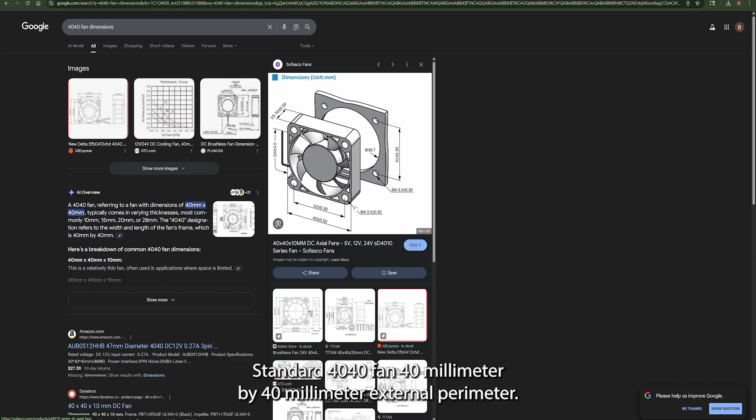Now the fan I'm creating a vent for is very simple, standard 4040 fan, 40 millimeter by 40 millimeter external perimeter. What's nice about something standard like that is there are existing drawings. You don't have to go measure all the dimensions that are critical to your design. You can look it up and just model based on that. So that's what we're going to do rather than having to model something or measure something custom.

So the first thing we need to do is go ahead and create our first sketch. I like to model things in their installation orientation. Some people don't, but that's what I'm going to do. So my box will be upright. So I'm going to model it on this front face. One of the first things I always do when modeling is I create center lines. Sometimes I use them, sometimes I don't, but just as a general practice, they make doing constraints much easier.

And so I'm picking a line up here. Oops. Picking a line and then picking center line to make that a dashed line. It's a little hard to see on the red, but you can see how it's a dashed line, meaning that's not an actual model construct, but just something that I can use to set constraints off of.

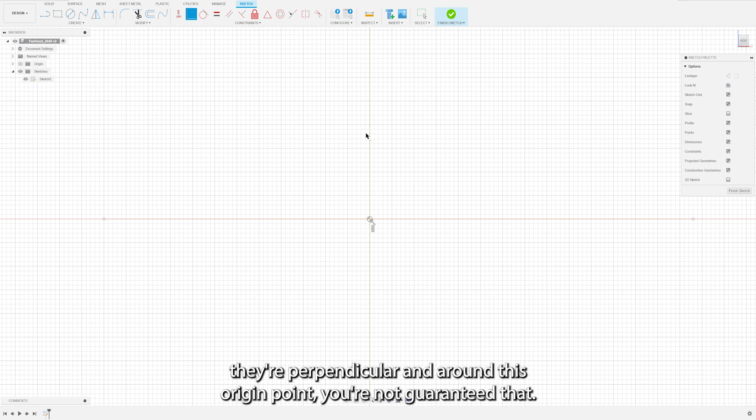Unfortunately, in Fusion, even though these look like they're perpendicular and around this origin point, you're not guaranteed that. So I'm going to go ahead and pick a coincident constraint, click my line, and then click this origin. Now it's guaranteed to be on that origin. I'm going to do the same thing here, and now they're both exactly on that origin.

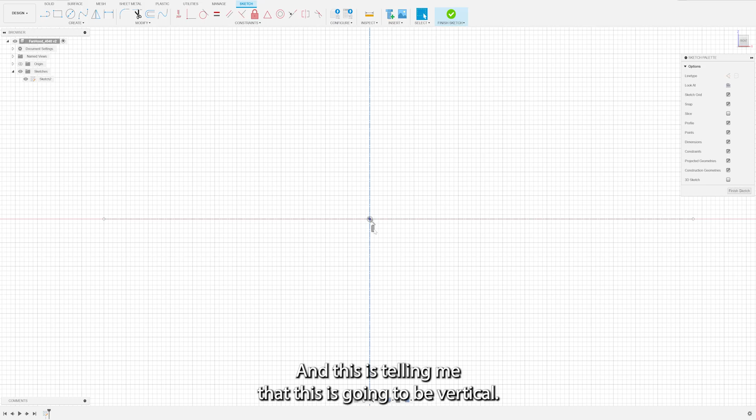I can see right here that it did apply a perpendicular constraint to these two lines, so they are at 90 degrees, and this is telling me that this is going to be vertical. Now, just to double check, I always like to go ahead and say horizontal/vertical, and I'm going to click this line. It says that's over constrained because of this perpendicularity constraint combined with this horizontal constraint. So that's okay. That just means that I am guaranteed that these are what I want. They are a perpendicular set of construction axes around the origin.

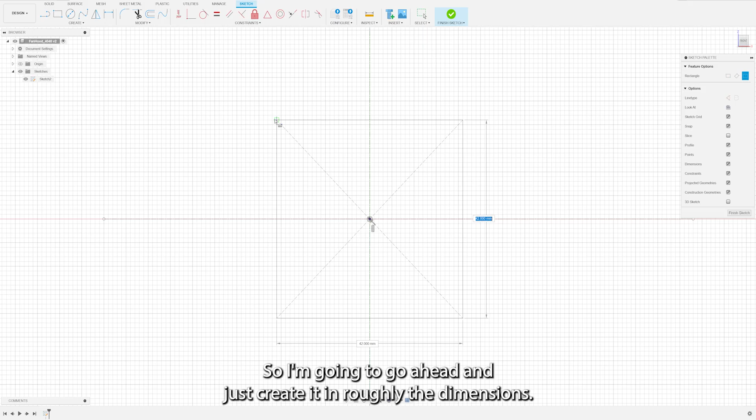So what that lets me do is I can now go ahead and start my feature set knowing that I have a good reference point if I ever want to do any symmetry constraints, which especially for a design like this fan, I will want to do. So I'm going to pick a 2-point rectangle, but I'm going to come over here to my sketch palette and do a center rectangle because this is going to be a symmetric square that I'm creating. So I'm going to go ahead and just create it in roughly the dimensions I need.

A mistake a lot of beginners make is they try to create their initial features at exactly the size that they want them to be versus roughly the size they want them to be. So just create a square or a rectangle of approximate dimensions you want, and then come in and size it using your actual entry box here.

Another thing I know from the drawing that I had pulled up earlier is that this is a square, not a rectangle. So I use this equal constraint, click this line, then this line, and that makes this an actual square. And you can tell that because all these lines turned black. So if I undo what I just did with Control Z, you'll notice this line's blue and this line's black. The fact I did a center rectangle automatically makes these symmetric around this center point.

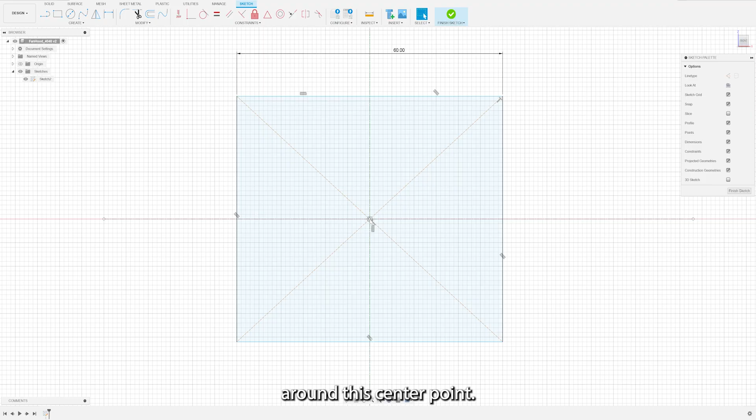But the fact this is blue is telling me it's what we call partially constrained, meaning I can still move this. Whereas this black line, I can't move it. I can click on it and drag and nothing happens because it's constrained by this. What you really want is fully constrained models.

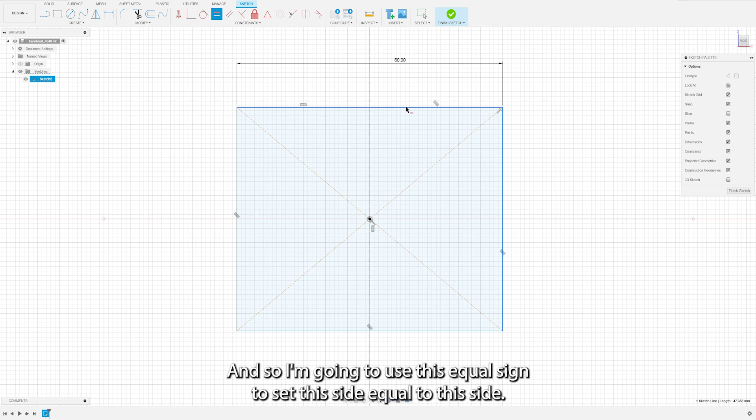And so I'm going to use this equal sign to set this side equal to this side. Now when I do that, it automatically resizes to a square, and you'll notice all my lines are black now, not blue. So that means this model is fully constrained. I cannot move any of these items. They're fully dimensioned. It's completely parameterized. This square is now where I want it to be.

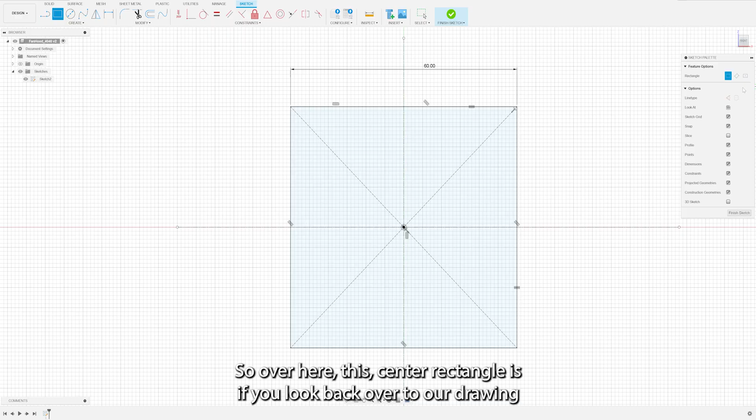Now the other nice thing about doing this as a center point rectangle, so over here this center rectangle, is if you look back over to our drawing that gives us our dimensions here, these circles for my bolts are all going to need to be symmetric. They're all equally spaced around the fan housing. So this center point rectangle gives me these diagonals.

And if I put my circles on those diagonals, it just makes it a lot easier to then make everything symmetric because I can make sure this green is on this diagonal. You can see I'll get a green line there whenever I am horizontal to this circle, which is what I want. So we're going to go ahead and create the rest of these circles, and then we'll dimension them as well.

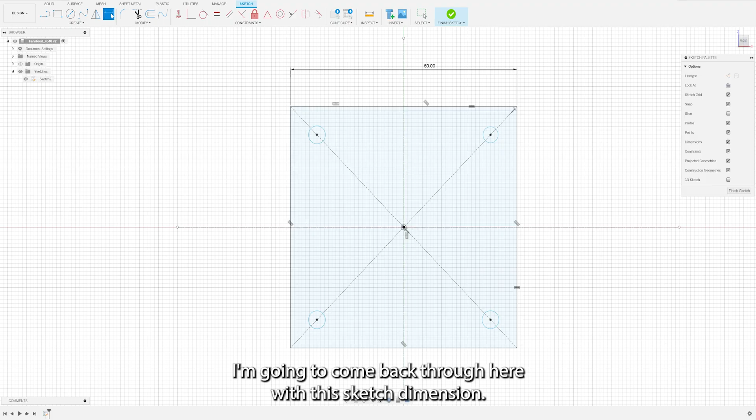So again, this is not the actual size of the circles. I just made 4 randomly sized circles of about the size I wanted. I'm going to come back through here with this sketch dimension, click on the circle, click out here, and I know those are 4 millimeters per the drawing. However, I'm going to 3D print this, and my 3D printer has some tolerance in it that I've just learned over time of using it, so I'm actually going to size these at 4.3 millimeters. That will allow my through-hole bolt to pass through cleanly without the threads catching on the hole.

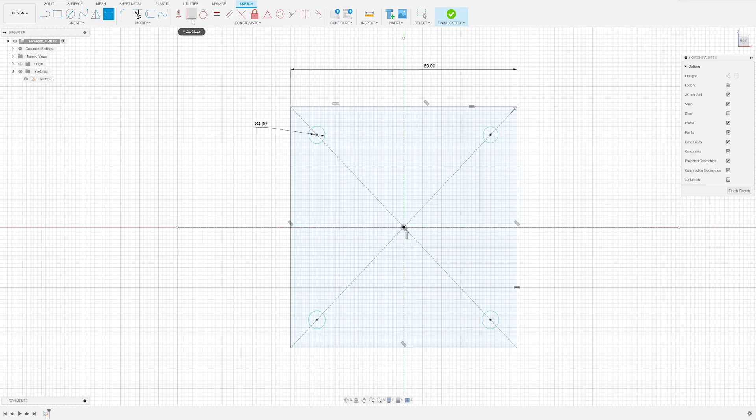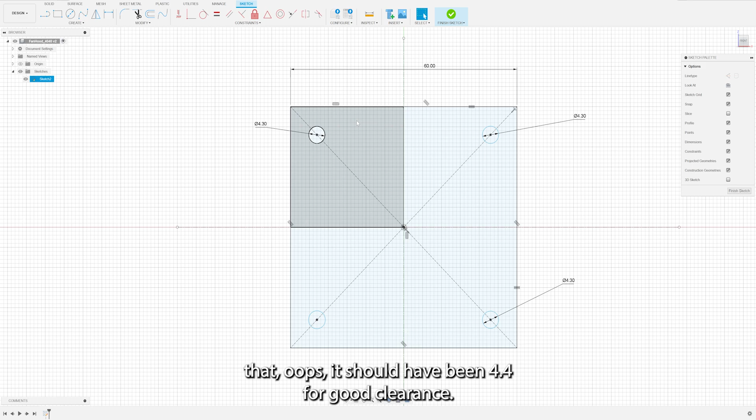Now you'll notice all these are still blue, and we talked earlier about wanting to have things fully dimensioned. So one thing, I'm going to use this equal constraint to apply this 4.3 to all 4 of the other circles. Now I could do that by just dimensioning all of these circles as well, 4.3, all the way through all these circles. But let's say I go through and I 3D print this and realize that, oops, it should have been 4.4 for good clearance. Well, now I have to go change 4 dimensions.

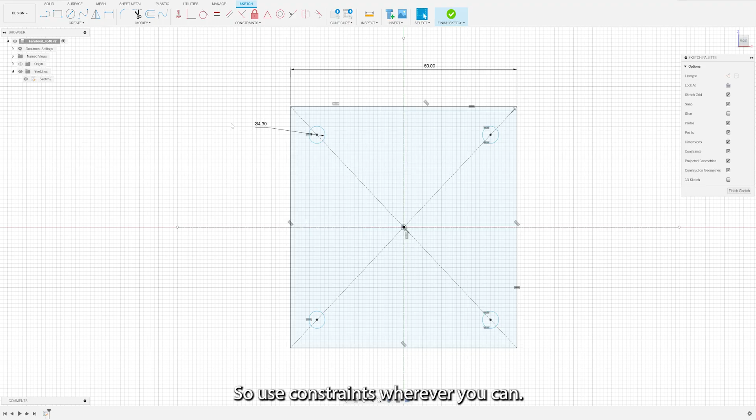Instead, if I use this equal here and just say, hey, this circle's size is equal to this circle's size, and this circle's size is equal to this one, and this one is equal to this one. Now I can just change 1 dimension, and all my circles change. So use constraints wherever you can, and it greatly simplifies your ability to scale and modify your drawing.

Another thing, even though those green lines showed up that showed that I placed these as horizontal and vertical items, we really want to make sure that happens. So I'm going to go through and manually apply that constraint as well to all of these. And that, in a lot of cases, is going to say it's over constrained because it already did it, but that's okay. I really want to make sure that happened. So actually it's showing me it did not automatically apply those. And oh, that one did. So sketch geometry is over constrained. Again, that's okay. It just means that that constraint was already there.

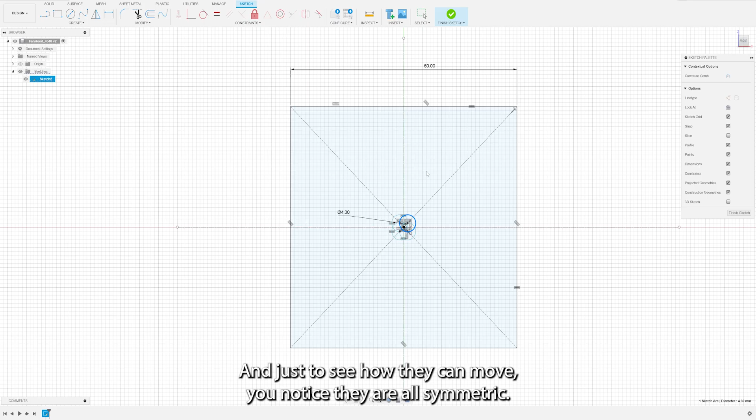So we have one more thing we really want to make sure we do, because you notice these are still blue. So if we're curious about what is unconstrained, we can grab these and just see how they can move. And you notice they are all symmetric, right? They all move together. But there's obviously a missing dimension. It's the hole spacing. So how far apart are the holes? So I'm going to go look on another screen here over to my hole dimensions, and those are 32 millimeters. So we're going to type in 32 here. Now you'll notice all my lines everywhere are black. This drawing, these holes, everything is fully constrained.

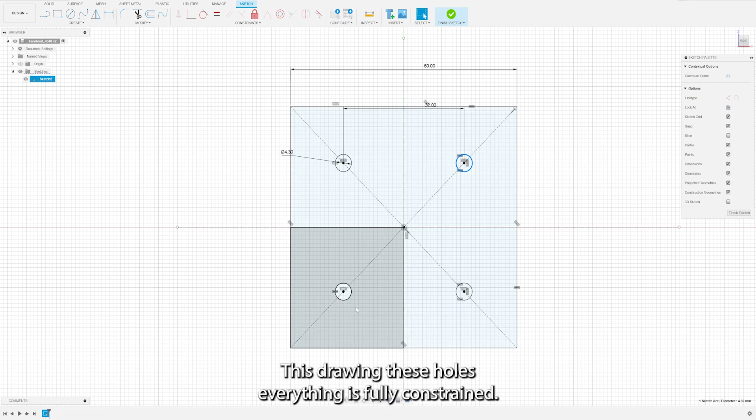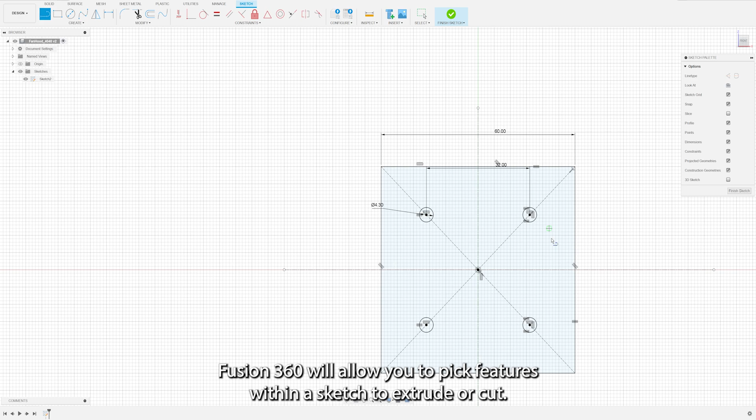I like to put as much as I can into the sketch, and then when I do cuts and extrusions, I can just keep referring to the same sketch. That's a little unique, at least for me, because most of the other modeling packages I've used professionally, you have to extrude the entirety of a sketch. Fusion 360 will allow you to pick features within a sketch to extrude or cut, so it makes it kind of nice because you can go ahead and do everything against common sets of constraints.

So this fan shroud that I'm going to make, I actually am going to press nuts into it, so that the bolts that I'm going to push in from the other side can thread into the nuts on this. Now that is obviously a horrible hex nut hole, but that's okay because again, constraints, right? I'm not going to try and make this exact. I'll make it approximate. Oops, I didn't want that coincident. Maybe I do. Maybe I don't. I don't know. We'll see what the dimensions are. So this obviously is not the right shape.

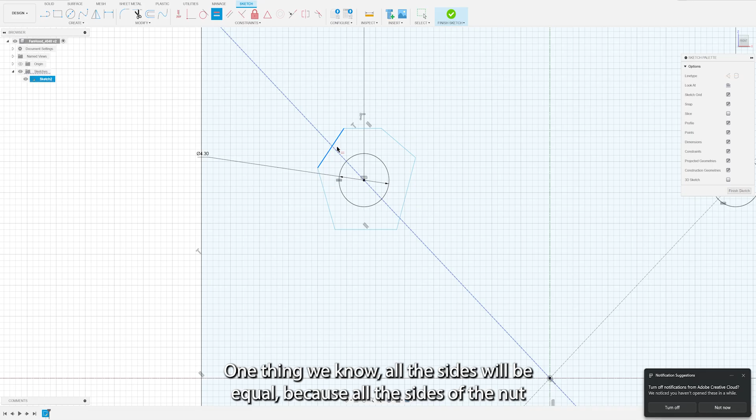Let's go ahead and start using constraints again. One thing we know, all the sides will be equal because all the sides of the nut that will be placed there are going to be equal. So we'll just go ahead and start applying some constraints. That looks a little better. Kind of drag it into the right general shape.

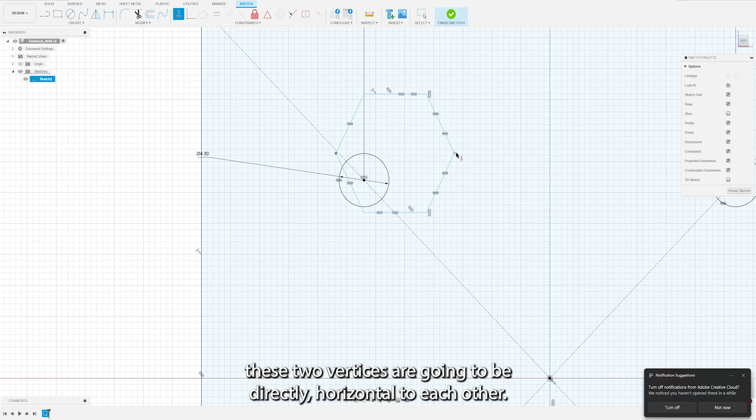And now I can start applying things like horizontals and verticals. So we know that these are going to be directly above each other. And we know that these 2 vertices are going to be directly horizontal to each other. So hit escape. Escape's always a good key to kind of get out of whatever we were stuck in.

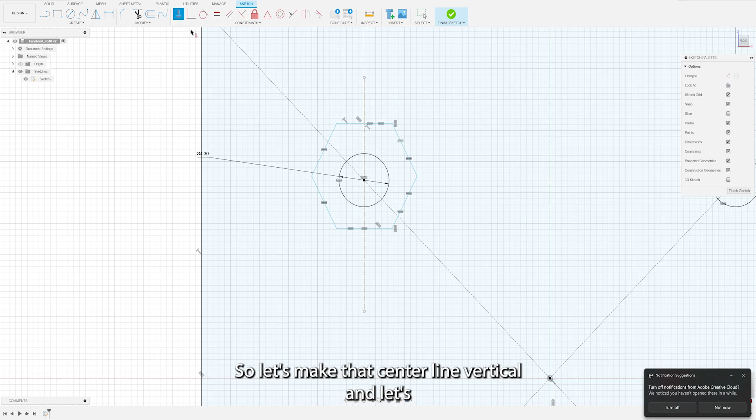And now I want to drag this guy around this hole. So I need to be symmetric about this hole. So I'm going to add another center line around this hole just to make things easy on myself. So let's make that center line vertical, and let's make it coincident with the center of my circle.

And now I can use this symmetry constraint right here to hit these 2 vertices and put it around this hole right here. And then I can use my horizontal constraint with the center of the circle and one of these vertices, and now I have the sketch of the outline of the cavity where it needs to be.

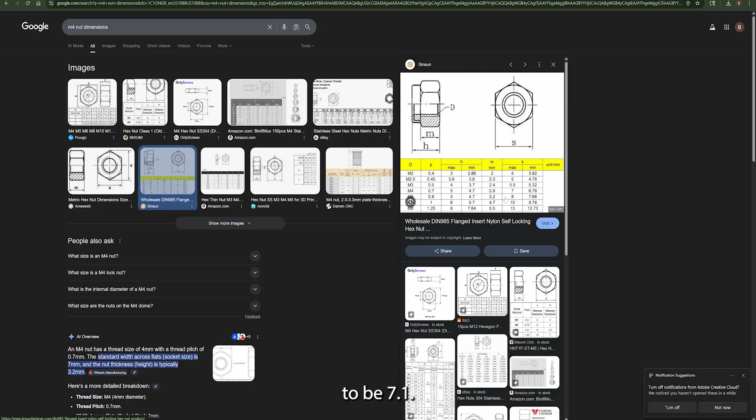So I can go through here and dimension it in accordance with that drawing that we were just looking at that says that this needs to be 7.1. Second set of dimensions between these flats. And if I make that match the first, now we'll notice all my lines are black. So this is a fully constrained sketch.

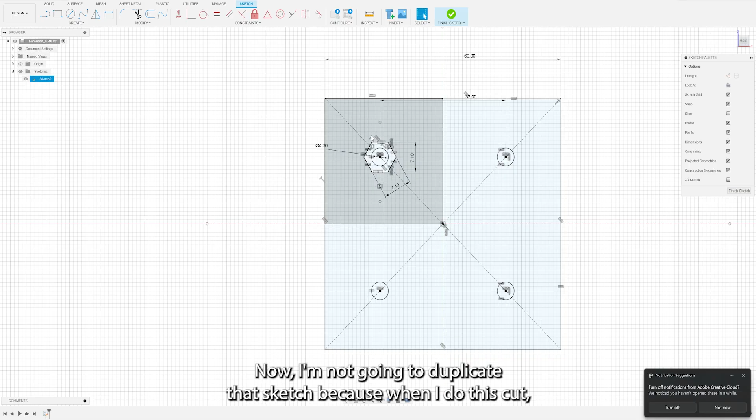Now I'm not going to duplicate that sketch because when I do this cut, I'm going to replicate that using a pattern feature that we'll show later. There's no reason for me to go create this over and over and over again. I probably could have done the same with the holes, but I'm going to approach those a little differently, and I'll show you that later.

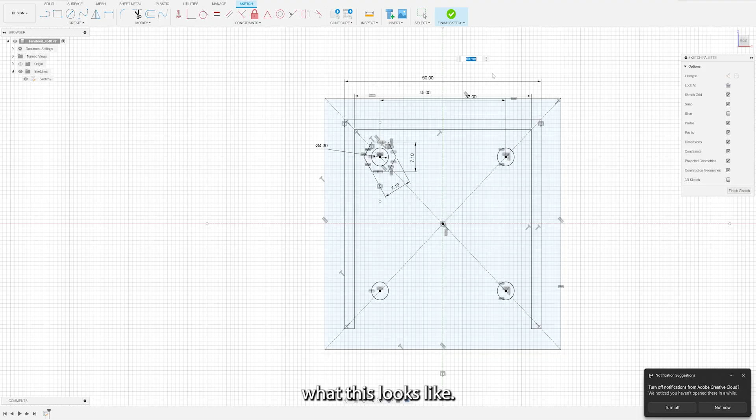I think this is all the features I want to put on my base drawing. I don't think I need a perimeter this big now that I kind of see what this looks like, so I'm going to bring this down to about 50. No reason to waste the extra material. So now I have this feature set, and I want to go ahead and create my extrusion. So I'm going to hit the extrude button.

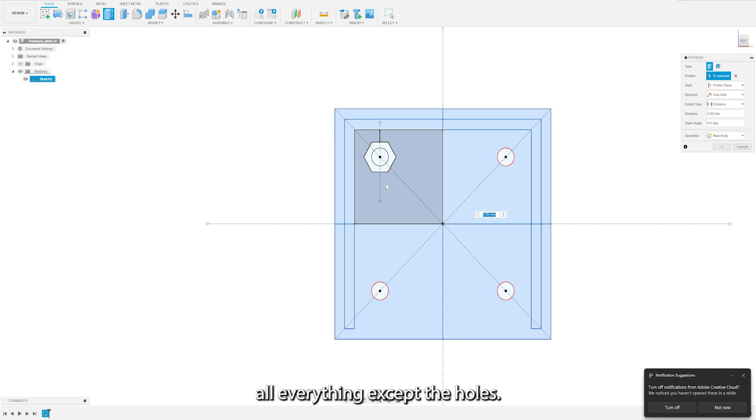And the pieces I want to extrude to start are going to be everything except the holes. And I'll show you why that is in a second, because we're going to re-extrude some of this as a cut, but a partial cut. So I'm going to select all of these items, and I'm going to rotate this with my middle mouse wheel button by clicking and moving that around. And now I can see this arrow and get some perspective about what I'm doing with this extrusion.

So 5 millimeters, that's probably good for what I want. That's just under a quarter inch, and that's probably good. So we're going to go -5. We're going to lock that in, and it's going to extrude a very boring looking rectangle.

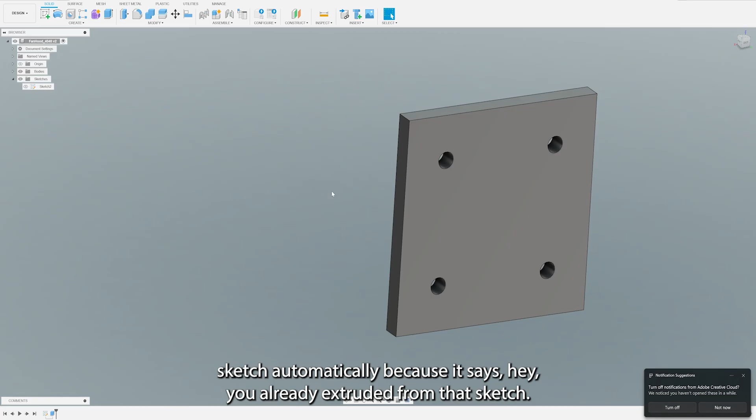Sometimes after you've done an extrusion, Fusion 360 might hide this sketch automatically because it says, hey, you already extruded from that sketch, you must be done with it. In our case, we are not done with that sketch. So if that happens to you, you just need to go over here to your model browser, hit this drop down, and then unhide. Click that little eye to show your sketch. And now you'll see I can see my sketch again.

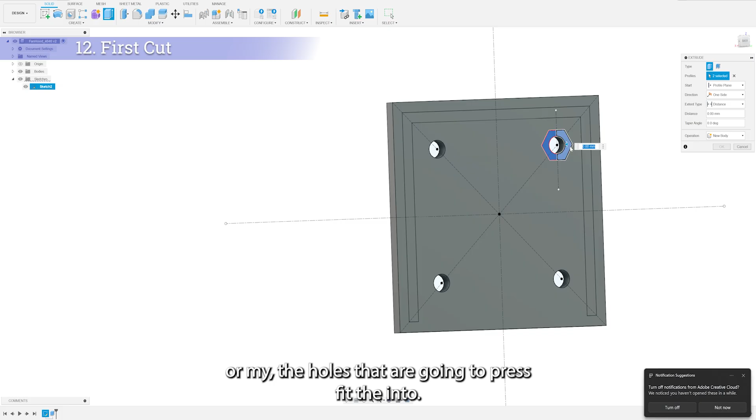The next thing I want to do is go ahead and extrude my bolt holes, or the holes that are going to press fit the nut into. And I want those to be cuts, not extrusions. So I don't want that. I actually want it to go the other way, but I don't want it to go all the way through. So I'm going to click and drag that, and Fusion's smart enough to realize that since I went into the material, it changes this operation to cut. I'm going to go about -2.5.

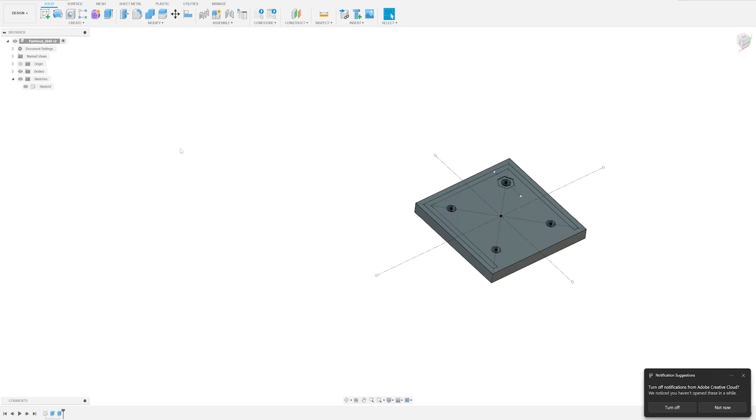Oops. I obviously did not extrude that enough. So in this situation where I made a mistake and did not extrude it far enough, it did extrude the cut, but that's not deep enough to press fit the nut into. You can come down here. This is your model history, and you can just double click on any feature that you want to change.

So I'm going to double click on this extrusion because I obviously did it wrong. Instead of 2.5, I put 0.25. So 2.5, and that needs to be a negative because it's a cut, or because it's going into the material. Now I have a nice deep recess to put the piece in.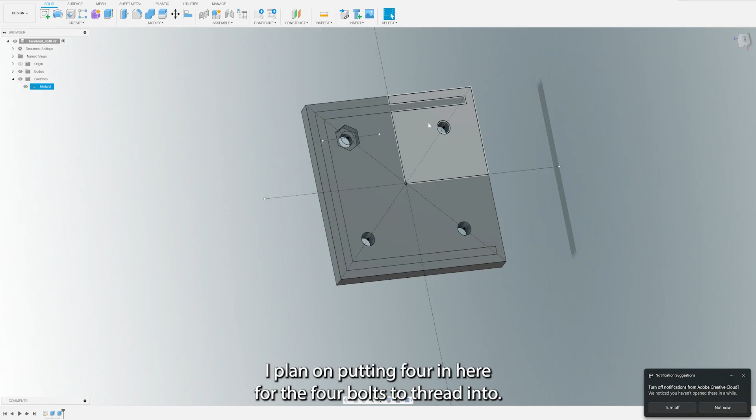Now that's just one of them. I plan on putting 4 in here for the 4 bolts to thread into. So the easiest way to do that is with this rectangular pattern tool. Now we can do that off feature sets, but we are going to go ahead and do features. We're going to select features, and now it's saying, hey, what feature do you want to repeat? And what we want is my last extrusion, which was that cut. So I'm going to come down here to the model tree and click that extrusion.

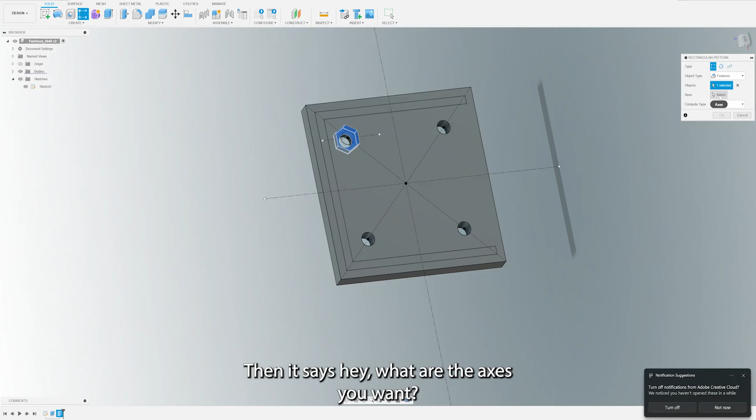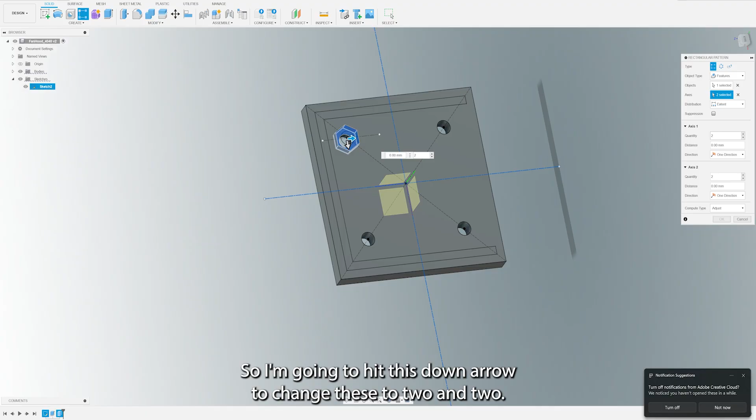Then it says, hey, what are the axes you want? Well, I want to pick 2 axes. I'm going to extrude in this direction and in this direction. So now I've picked 2 axes, and it adds those to my rectangular pattern tool over here. So for quantity, we're just doing 2 of each. So I'm going to hit this down arrow to change these to 2 and 2. Now right now they're right on top of each other, so just to get a visual approximation, we can go ahead and drag these guys across.

Now from our prior drawings, we know exactly what that dimension should be, and that dimension happens to be exactly 32 millimeters. Fusion's also pretty smart, and it says, oh, you probably want to use this circle, so it automatically finished putting it right there when I was doing that drag. If it didn't get that right, you can go into this distance box and type the actual distance that you want it to be. In our case, it's 32 millimeters from our drawing earlier. So I'm just going to do that and hit OK.

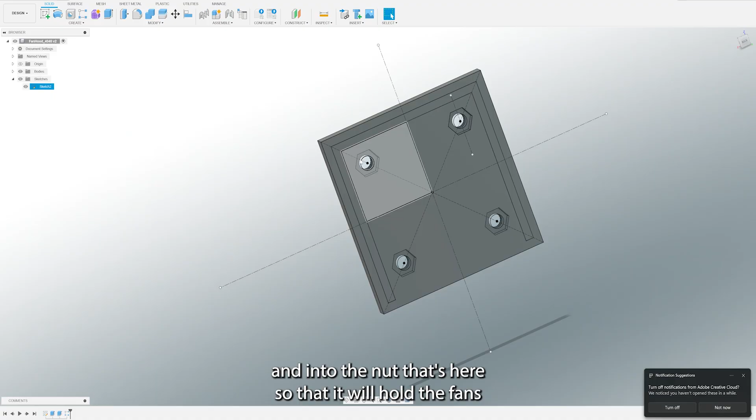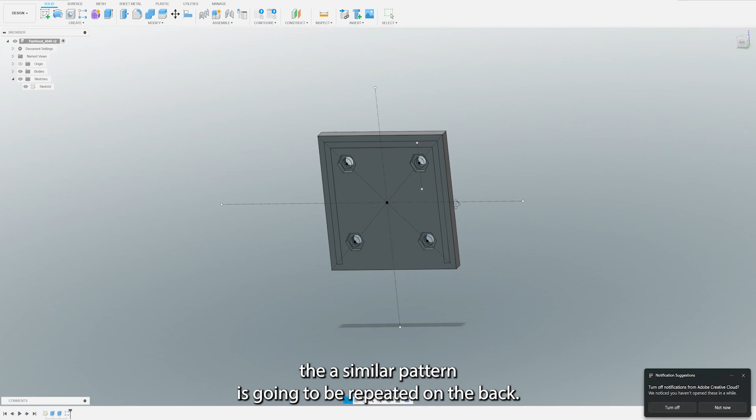Now you'll notice I have 4 recesses to put my pieces in so that I can thread through my lighting controller box through this hole and into the nut that's here so that it will hold the fan shroud in place. Now earlier I called this the room for the gasket. This is actually what I'm going to sweep for the fan hood. I'm going to sweep it a bit over like this to protect from any water or other ingress of things I don't want. A similar pattern is going to be repeated on the back that will be a cut. But this is going to be a sweep to form the actual fan shroud part that protects it from the elements.

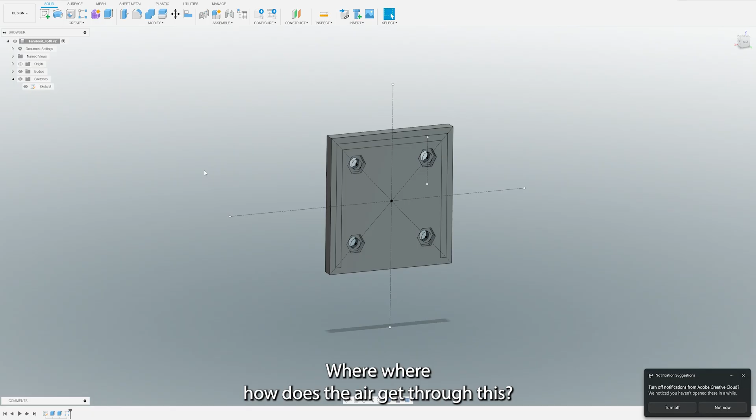Now there's one more piece that I noticed I forgot, and that is the circle for the fan. How does the air get through this? So I'm going to revisit my original sketch, again from this model history down in the bottom left of the screen. I'm going to double click on that sketch so I can get in to edit it again. And we have one more feature to add here, center diameter circle. We're going to click that. Also, shortcut key is C. So I can hit C, and now I can create this circle.

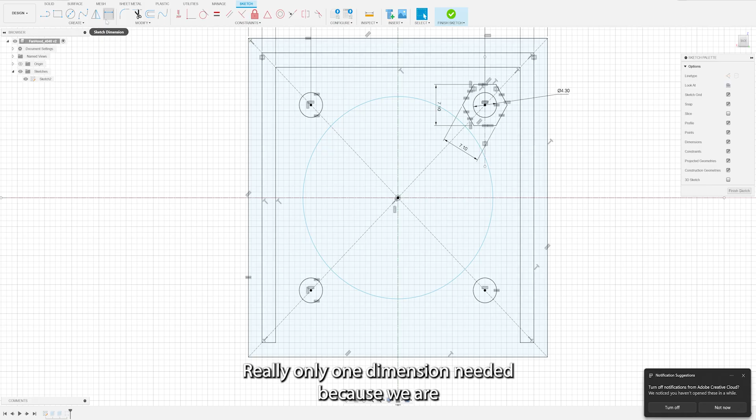Really only one dimension needed because we clicked on the center of this whole sketch. Symmetry really saves us a lot of trouble here. And now all we have to do is add a dimension. Per the drawing we had up earlier, that dimension should be, let's go over here and see. Looks like that dimension is 38.7 millimeters. So let's go ahead and make that 38.7. There we go. Now I can finish with this sketch again, and I can go ahead and extrude that.

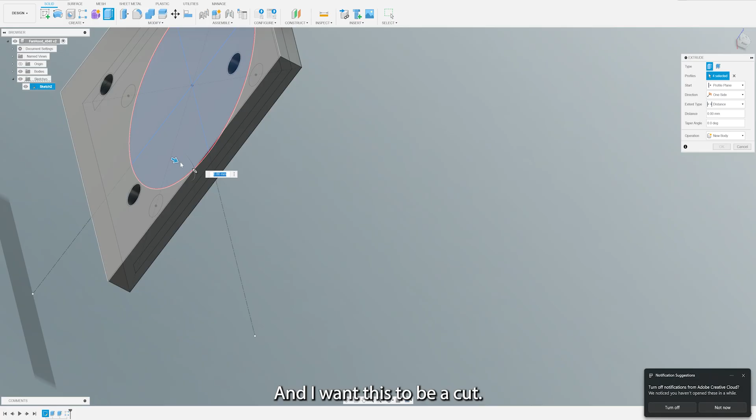Oops, selected too many things. Unselect them all with that X. Select that piece, that piece, that piece, and that piece. And I want this to be a cut. So I over drag. Again, a lot of people when they're new to modeling, they try and be very careful and get this right at the edge of the part. And you can do that, but I'm just going to drag it out. And I'm going to go here and say through all. And now it says, oh, okay, you want to go through anything that's there. And that's what I'm going to say is okay.

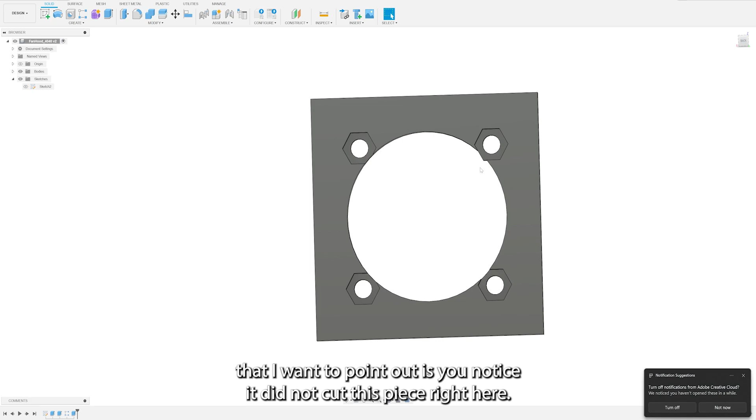I do have one interesting thing that I want to point out: you notice it did not cut this piece right here. So let's go back into this extrusion and we can see why. I picked these 4 quadrants of the circle, but it did not get this little piece. So I'm going to grab that little piece too and then hit OK. Now it got rid of that and I have the full area for my fan to flow through.

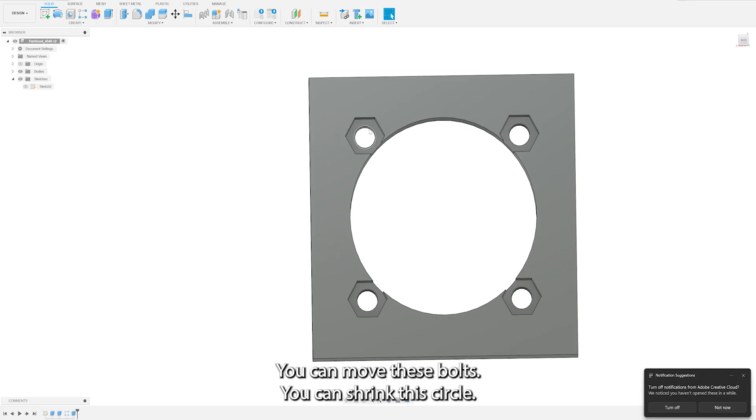Again, you can go through and fix this. You can move these bolts, you can shrink this circle, you can make these smaller, there's lots of ways to fix it. It doesn't have to be an M4 bolt, it could be an M3, but in my case, this is fine.

Okay, so now we have the mounting plate done, so we want to go ahead and extrude the fan shroud. Now, we're not just going to do a standard extrude here, or else we end up with something like this. So if I grab all these pieces and I hit extrude, we end up with something like this. Well, I guess you could argue that would work. It would protect mostly from a lot of your elements, but it's not very aesthetically pleasing. It's a waste of a lot of material. This isn't a great design, but it could work.

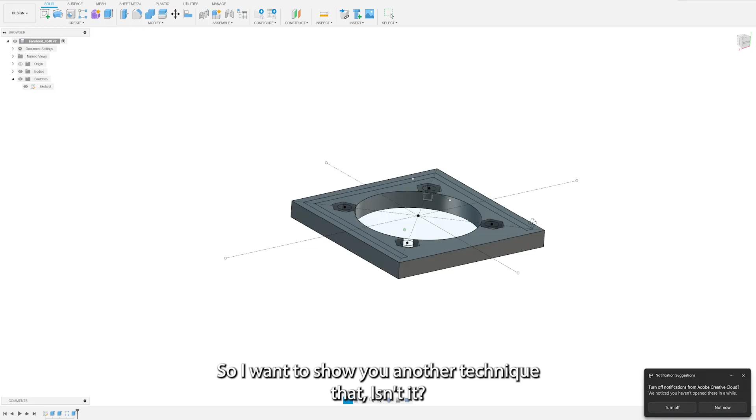So I want to show you another technique that a lot of people don't use because they find it scary because they're unfamiliar with it, but it's really pretty straightforward. If you hit this drop down in the create menu, we can do what's called a sweep. And you have these really funny shapes that this shows that you can create. And that's really powerful, but it can be a little bit tricky. So we're going to go ahead and do a sweep.

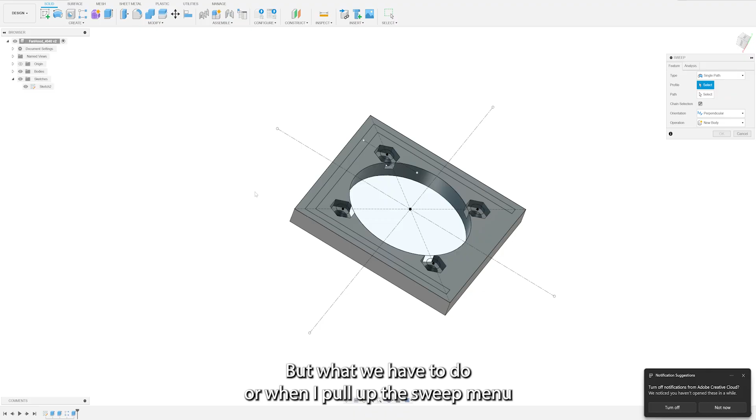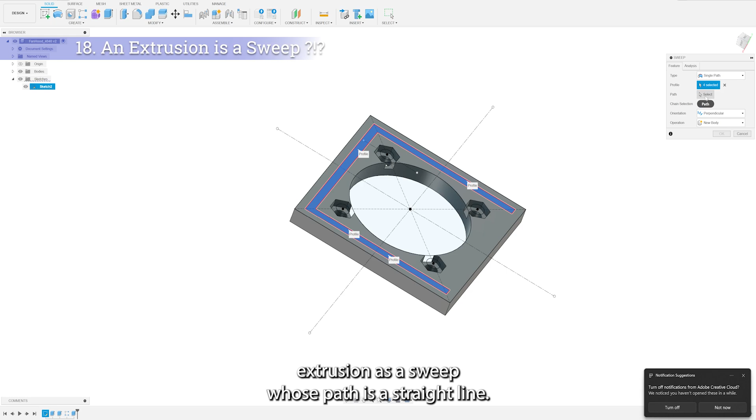But I want to pull up the sweep menu just to show you what that looks like. So we have this thing, profile. Well, profile is, what is the thing that I'm going to sweep along the path that I subsequently sketch? And then we have path. So you can think of an extrusion as a sweep whose path is a straight line. In an extrusion, we're just extruding straight up or straight down. That's still a sweep, just a sweep with a straight line. A sweep allows us to make that line take different forms and shapes and paths.

So in this case, let me rotate this to the right side here. I want this profile to kind of go up and curve over to the right like this, right? Create kind of a curved hood for this thing. So I need to draw that path. Right now that path doesn't exist. So we're going to go ahead and cancel, but hopefully that helps it make sense what I'm about to do.

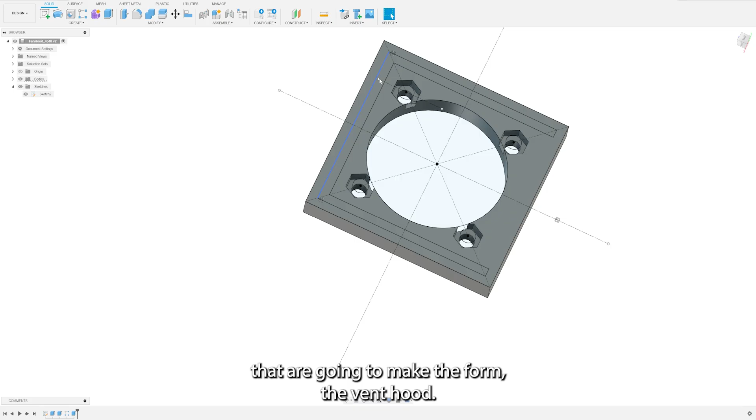With a sweep, we have to tell it what that path is, and that path is going to take the form of a sketch. So I want to extrude these outside rectangles here that are going to form the vent hood. But I have to tell the sweep where they're going to extrude to. So I have to create another sketch to tell it how to extrude these. I need a dimension to do that before we do so though.

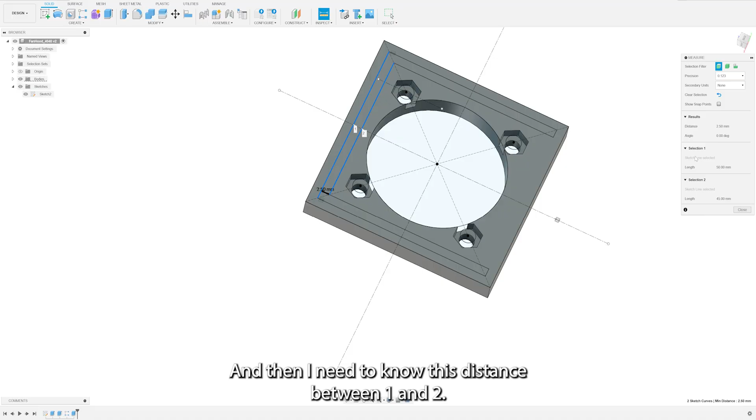So I'm going to measure this distance, which it tells me is 2.5 millimeters. And then I need to know this distance between 1 and 2. We're going to reset and pick these two guys. And that distance is also 2.5. So that means the middle of this is 1.25. So the middle of this line is going to be 1.25 plus 2.5. So 3.75 is the midpoint of these two lines. And that's important when I create my path, and I'll show you why.

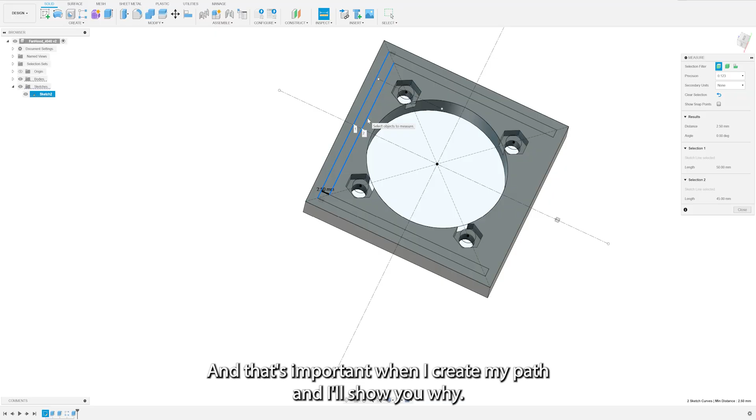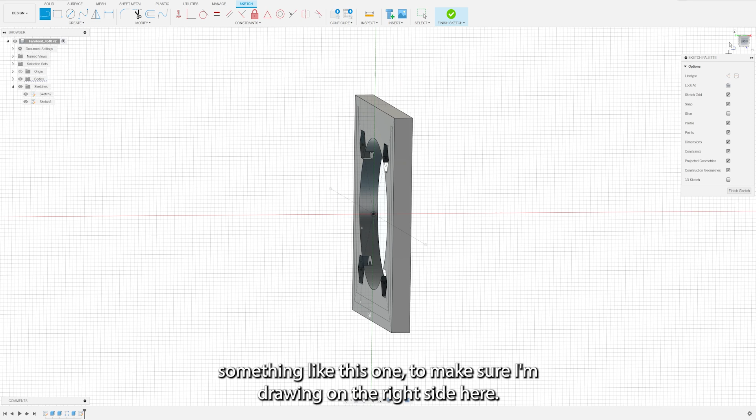So let's go ahead and create another sketch for our path. Now, because we used all this symmetry and we built about the origin, we don't have to build a construction plane. We get to just pick the existing origin plane that we started with. Now, the path is going to be something like, I just want to make sure I'm drawing on the right side here. I'm a little turned around because it's upside down. It's going to come out a little bit like this, then it's going to go down at an angle like this. So this is the path we want to extrude these rectangles along. We're going to bring them out a little and then sweep them down a little.

Now, where this point lies between these two lines is very important. That's why I took the measurements I took earlier. It needs to be in the middle or you're going to get some really weird artifacts when you try to sweep this. I really want this to be in the middle of these two lines, so I'm going to dimension it at the 3.75 millimeters that we derived from our measurements earlier. And that puts it right in the middle of those two lines.

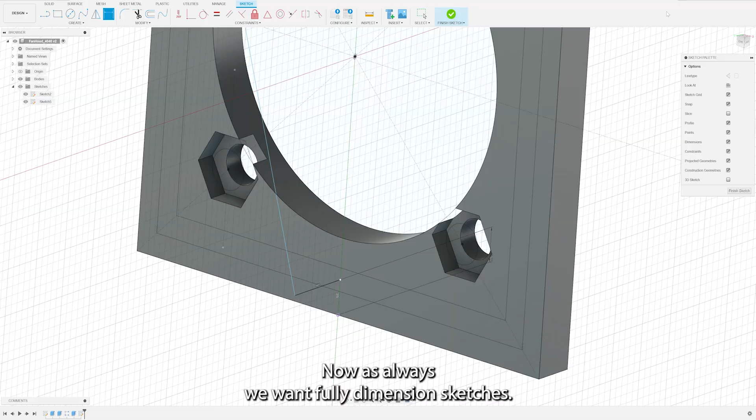Now, as always, we want fully dimensioned sketches, so this is not fully dimensioned. This line is, but this line is not, because I can do all kinds of things with this line, right? We need to fully dimension him so that we have a well-specified drawing. So the first thing I'm going to do is dimension the angle, right? How steep do we want this water runoff to be?

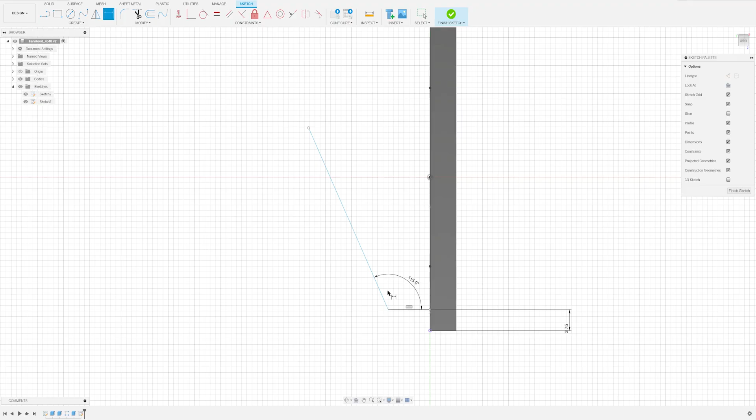And 115 is just kind of what I like to go with. It's going to give me access to get in here. That's one of the reasons I have this straight line here is, remember, there are two places I have to press parts into, like right in here. And my fingers are not small enough to do that if this straight piece here didn't exist. I wouldn't be able to fit those pieces in. Maybe with some tweezers or something, but it would be really hard. I'm going to give my room to get my stubby little fingers in here and press those in.

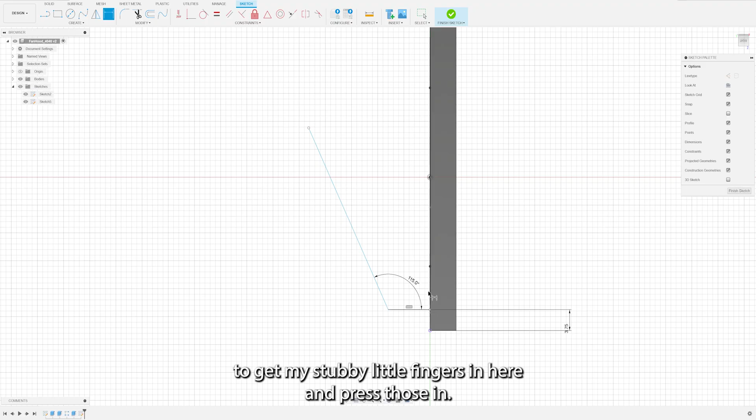115 is a pretty good water runoff angle. This is somewhat arbitrary. You can make it bigger or smaller, but I'm going to go with 115. Other dimension I need is I need to tell it how big is this piece. Well, I want it to be about 8 millimeters off. It gives me about a 1/4 inch to fit. And then how long is this line? We'll go ahead and go 36. That looks good to me.

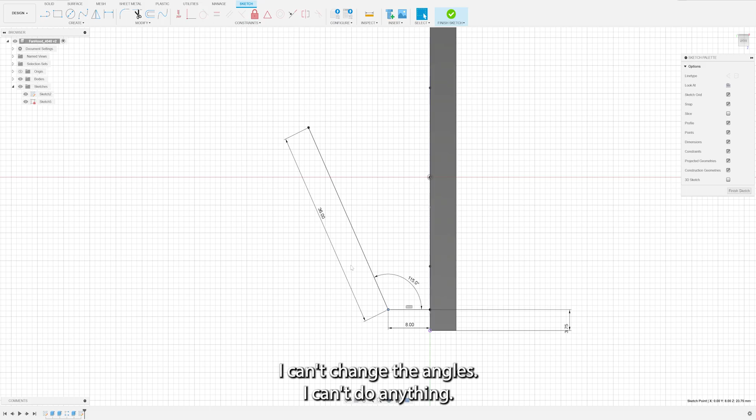Now you'll notice there's still room for it to move. Let's see why, right? If we grab this point and see what can it do? Oh, look, it can move. Right? Because I never told it that this point had to be on this line. So let's go ahead and say coincident. This point is coincident with this surface. Now we're fully constrained. I can't move any of this stuff around. I can't change the angles. I can't do anything. Everything's fully constrained, and that's going to lead to a predictable behavior of our sweep. So I'm going to go ahead and hit finish sketch.

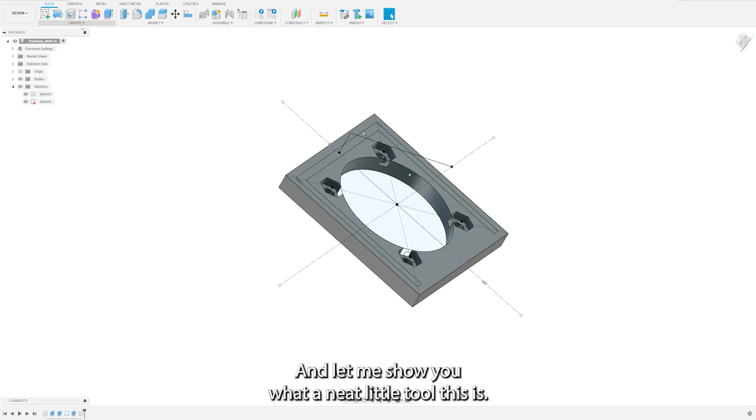So now maybe you can kind of visualize it, but this outer U shape of rectangles here, I'm going to sweep along this path. Now we have all the things we need to do our sweep, and let me show you what a neat little tool this is. So we hit this create drop down. It's not one of the defaults that's typically up here since it's used less often than things like revolves, patterns, and extrudes. We'll go down here, we pick sweep, and we're going to select all these little rectangle pieces that form our shroud. For the profile, so 4 selected because I picked 4 little segments here.

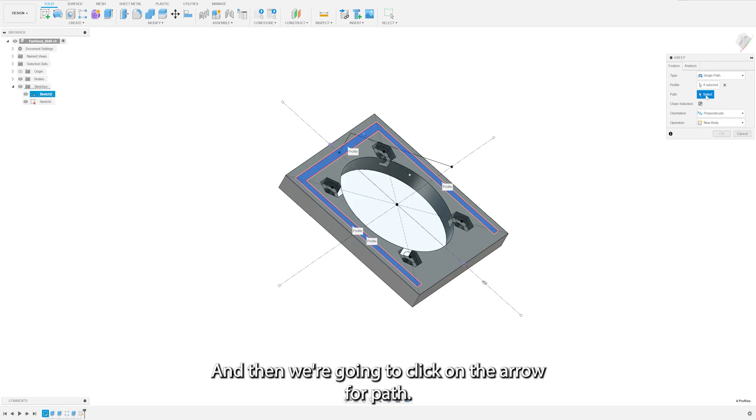And then we're going to click on the arrow for path. We can leave everything else as defaults for the way we've done this. And I'm just going to click this line that we just sketched. And boom, there we go. Look how easy it was to get a well-contoured shroud. We didn't have to make a bunch of little rectangles and cuts, because that's the thing.

You can do this without a sweep. You could create a bunch of constructed and angular planes. You could create a bunch of cuts and separate extrudes. I could have extruded each of these sides and this top. There's a bunch of different ways you can create the same geometry, but there's not many that's much easier than the sweep that we just created. So I'm going to hit OK. I'm going to go ahead and hide these sketches so we can look at what it looks like. And that's pretty close to what I wanted as a base shape.

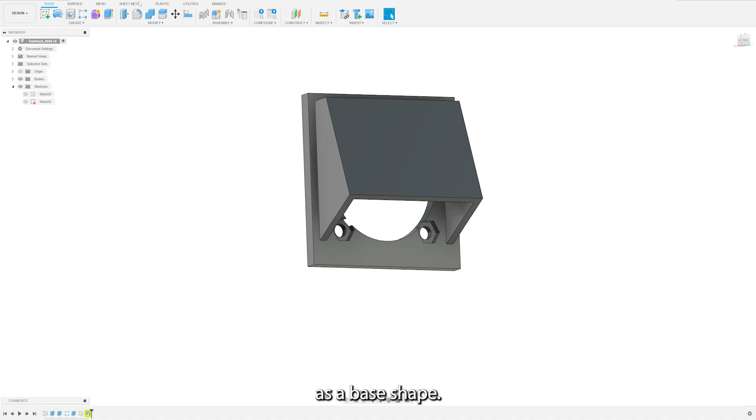Now we are pretty close to where we want to be with this guy. I'm going to add some rounds just aesthetically. It doesn't really need it. I could call this model done and good enough, but I'm going to go ahead and add some rounds and chamfers just because I think it looks a little bit better. So one of the ways we can do that is we come up here and you see this modify.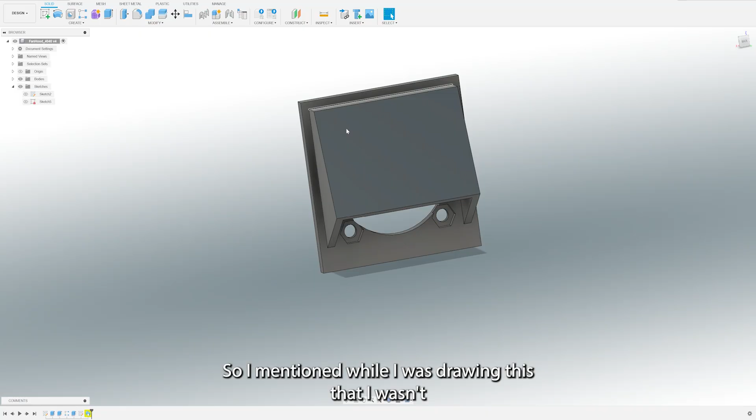So I mentioned while I was drawing this that I wasn't going to round a bunch of edges and things like that inside the sketches. It's a lot of work to do that inside the sketches and get all your circles centered properly. And if you're going to do formal drawings of these things, it makes them kind of hard. Whereas I can just round it after, and it makes things much more scalable if I ever change my design.

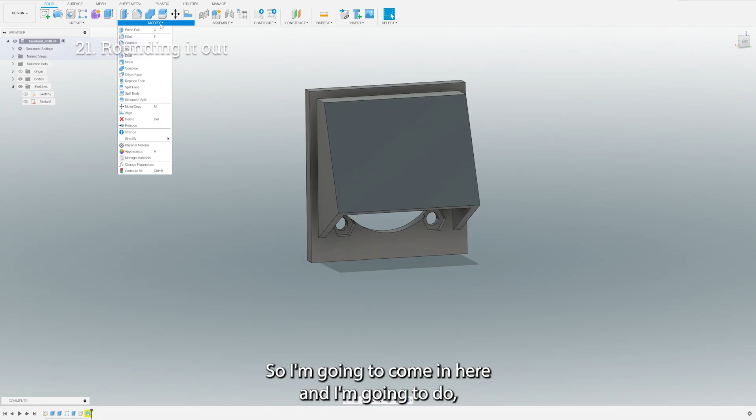So I'm going to come in here and I'm going to do, Fusion 360 calls it a fillet. Every other thing I've ever used calls it a round. It's the same thing. So it creates a rounded edge.

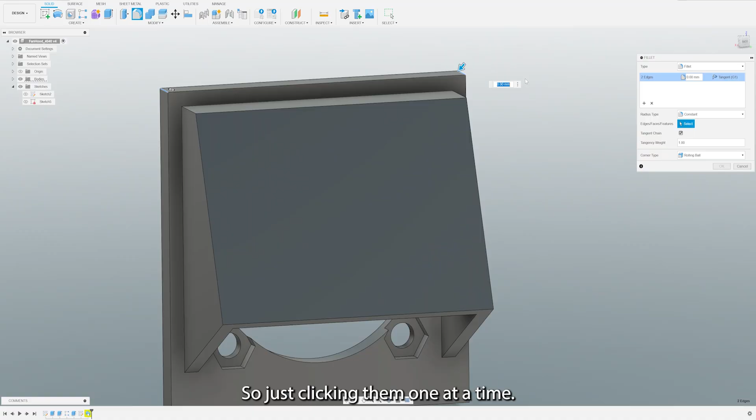So it's going to bring up this fillet window, and I'm going to leave it as rolling ball. And we're going to start by rounding these outer edges. So just clicking them one at a time. I'm not holding control or anything. This dialog just assumes that everything you click you wish to add to the selection set. So you'll notice it's got those 4 that it selected.

And I'm going to go ahead and say, I don't know, maybe let's go with a 2mm round. And the nice part is it shows you that in real time. You can kind of see what that round would actually look like. And 2 looks pretty good. I think I'm going to stick with 2. These are the primary rounds I wanted to add to the model.

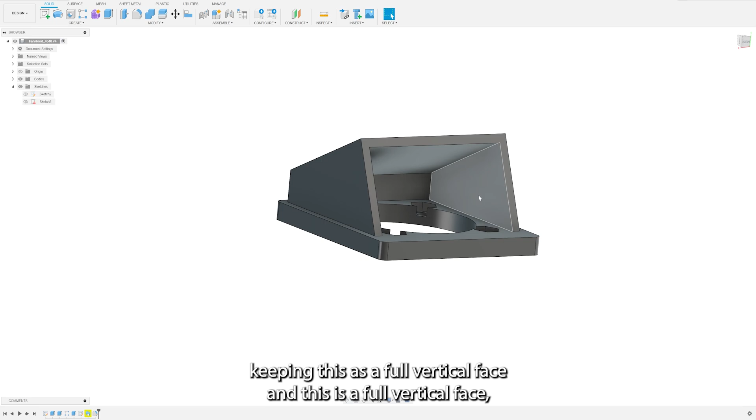But I'm going to go ahead and add some to round the exterior of this shroud as well. I'm not going to round the interior. Aesthetically, I would like to round the interior, but for the sake of 3D printing, keeping this as a full vertical face, and this is a full vertical face, is actually going to make things a lot more reliable to print.

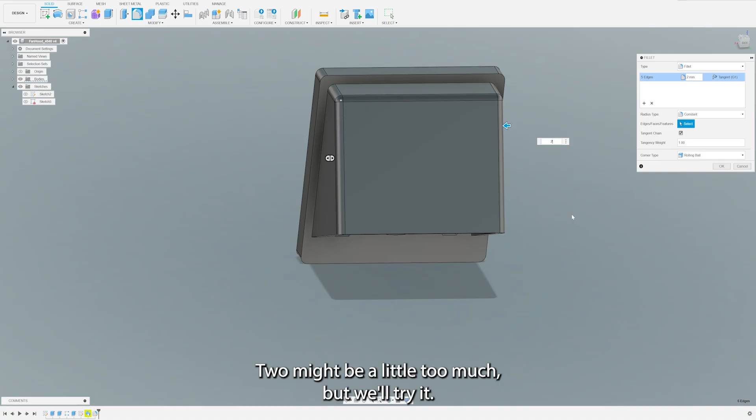So I'm going to leave the inside of this kind of Spartan and rectangular, but I'm going to round the outside of this. It's another reason it's nice to do these rounds after the fact is you can kind of pick and choose which edges you actually apply it to as opposed to the entire contour. 2 might be a little much, but we'll try it. We'll see what it looks like. Hey, that looks pretty good. I'm actually going to try out some 3, and I like the way that looks. So there we go. And that should be good enough to go ahead and export and print.

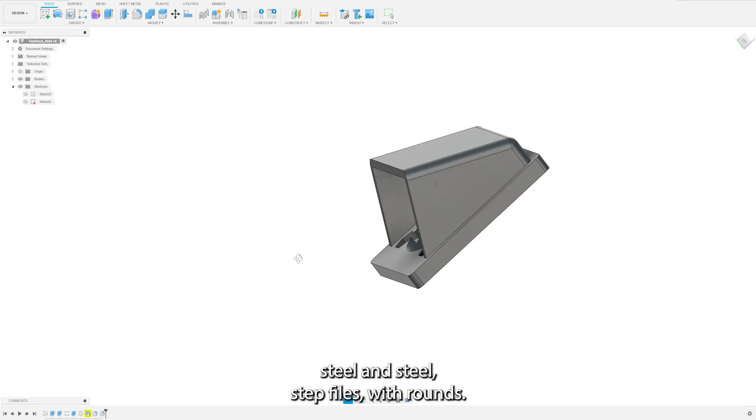Now, before I export this, I want to set the quality of what that export's going to be, especially since I created rounds. When you export these as STL or step files, it's creating a bunch of triangles and edges and things like that. And for the best export and the best print, you want those triangles to be really small so that you can as closely approximate these rounded features as possible. And so I'm going to go in and change what some of those settings are.

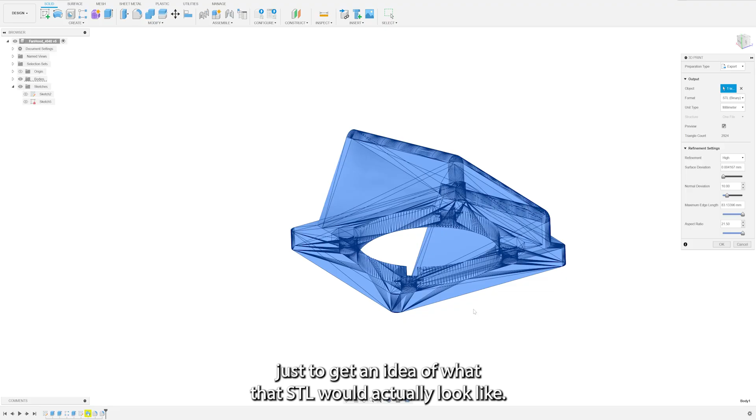So to improve those settings, what I can do is I go to this File menu and then 3D Print. And I'm going to say that I will want an STL binary, unit type's fine, and I'm going to select my part. So now that we've selected our part, we can go ahead and hit preview just to get an idea of what that STL will actually look like. And we can see where it's creating the shapes to try and approximate things like rounds.

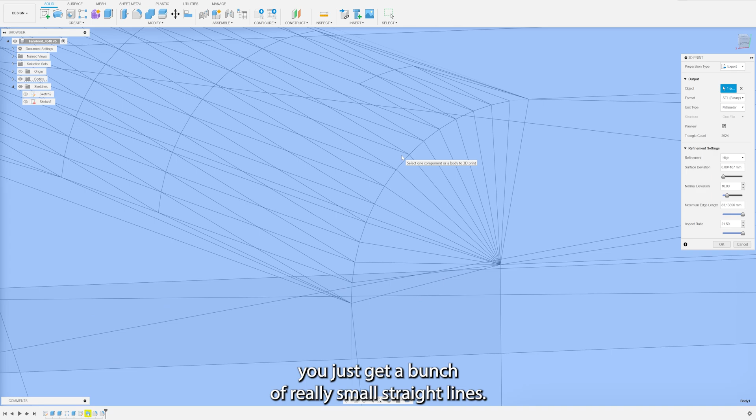You can only create linear shapes, so you don't get a true circle. You can see the approximation it's doing against the gray line that was the circle, and how all of these are actually straight lines. So you don't get a real circle when you do an export, you just get a bunch of really small straight lines. And the smaller those lines are, the more accurate you are towards being a true round.

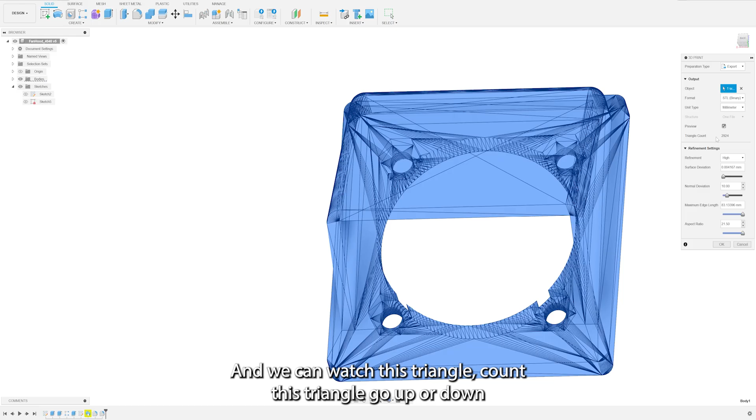And some models it matters, some models it doesn't. This model, it's not all that important. It'll be round enough for what I need. And the round will probably be better than the vertical step size for when I print it. But I'm going to go ahead and refine it just a little bit. And we can watch this triangle count. This triangle count can go up or down as we change these settings.

This triangle count is really kind of a way of thinking about the level of detail in your model. More triangles, more detail. You may or may not need that detail. So more triangles is not necessarily better, because more triangles does equal a bigger file as well, and you might not need that. Like, I don't really need much more than what's here, but we'll go and play with a few settings just to see what else we can come up with.

And you can see how I'm increasing triangle count as I change, in this case, the normal deviation parameter. I'm now up to 4,000. I originally started at about 3,000. I can change maximum edge lengths. This is one of the big ones that typically changes triangle count quite a bit. 5240 now. But you can play with these settings to get the level of detail you want in your model. And I'm just going to hit OK.

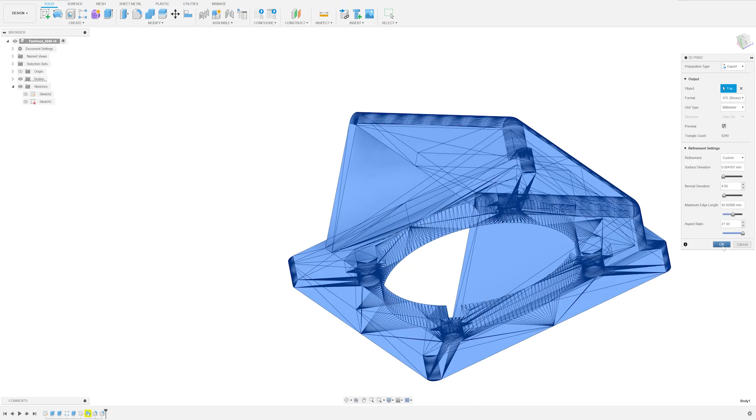And so it says, hey, well, where do you want to export this to? So you'll set the directory. It's going to be an STL file, and then you name what that export will be.